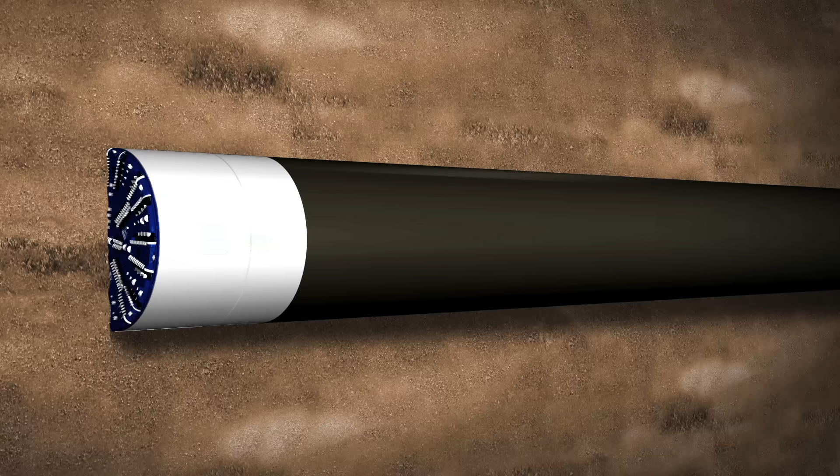When it opens in 2018, Crossrail will connect 28 existing stations to the West End, the City and Canary Wharf through 21 kilometres of new twin-bore tunnels under central London. 8 tunnel boring machines, or TBMs, will drive through the ground to create Crossrail's tunnels.

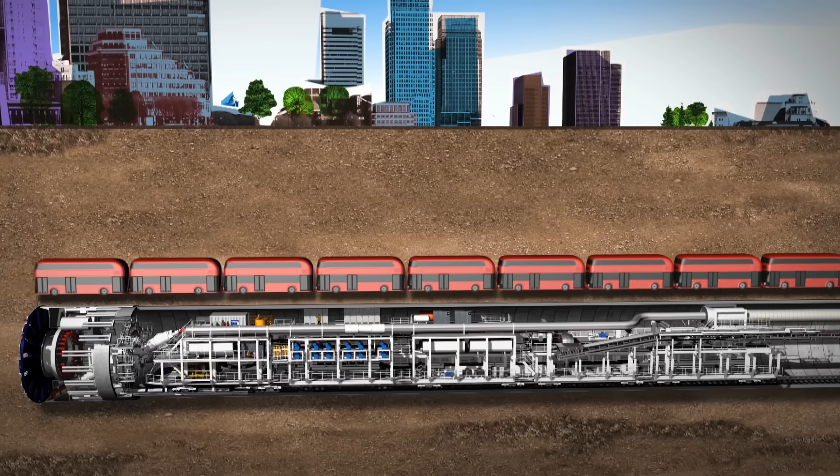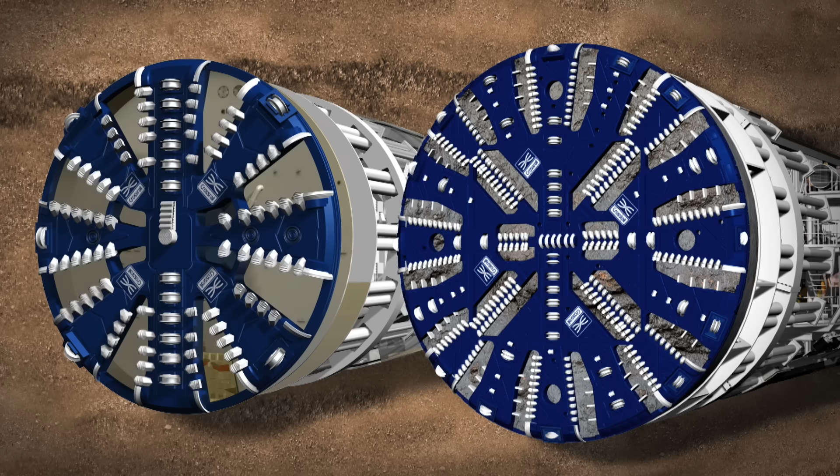A TBM is 148 metres long and weighs 1,000 tonnes. This is the equivalent of 14 London buses end to end and a staggering 143 buses in weight. It has a rotating cutter head at the front and a series of trailers behind housing all the mechanical and electrical equipment. There are 2 types of TBM being used by Crossrail: earth pressure balanced TBMs and mixed shield TBMs.

6 earth pressure balance machines will be used for the 18 kilometres of tunnel through the clay to the west and the riverbed deposits in the east, while 2 mixed shield machines will be used to drive the tunnels through the chalk beneath the River Thames. Depending on the geology below and the buildings above ground, each TBM will travel between 90 and 150 metres each week, ending up to within a millimetre of where it needs to be.

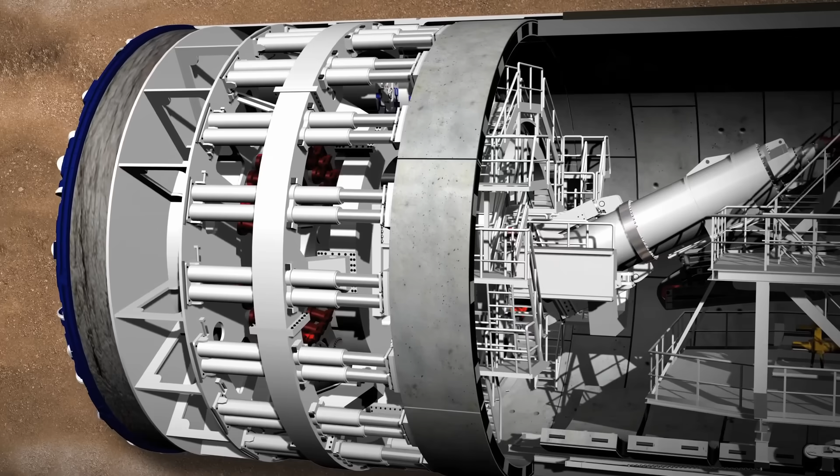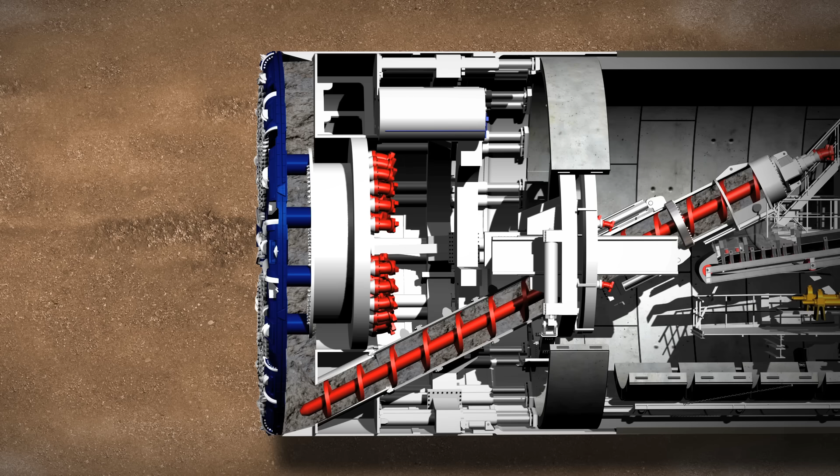The first part of the TBM's work is the tunnelling phase. The earth pressure balanced TBM has a cutting wheel which is pressed against the tunnel face by hydraulic cylinders. Inside the cutting wheel, the disc cutters and scraping tool loosen the material. If the earth is unstable, and to stop the tunnel face collapsing or digging too fast, the TBM uses the soil that has already been dug out by the cutting wheel to support the tunnel face. This creates a stable environment for the tunnelling to move forward.

The tunnel face is continuously monitored by pressure sensors. They check the turning power of the cutting wheel and the screw conveyor, and they also keep track of the material that's been excavated. The material is then taken away on conveyor belts. Once the tunnelling phase is done, the cutting wheel and screw conveyor are stopped and the ring building phase starts.

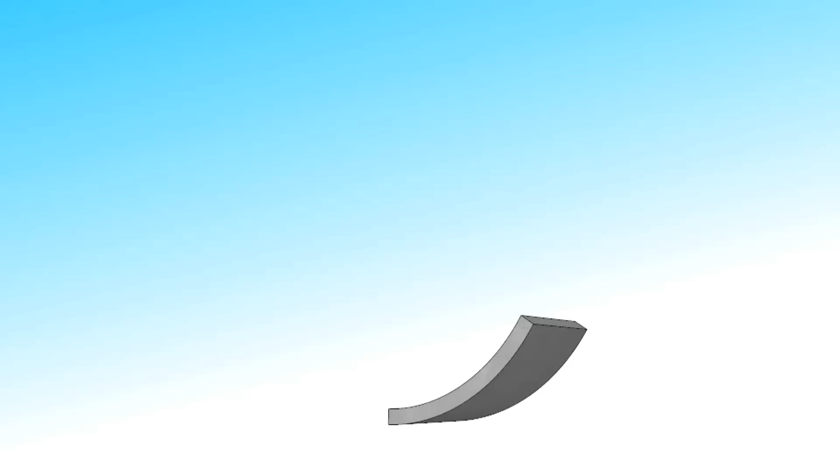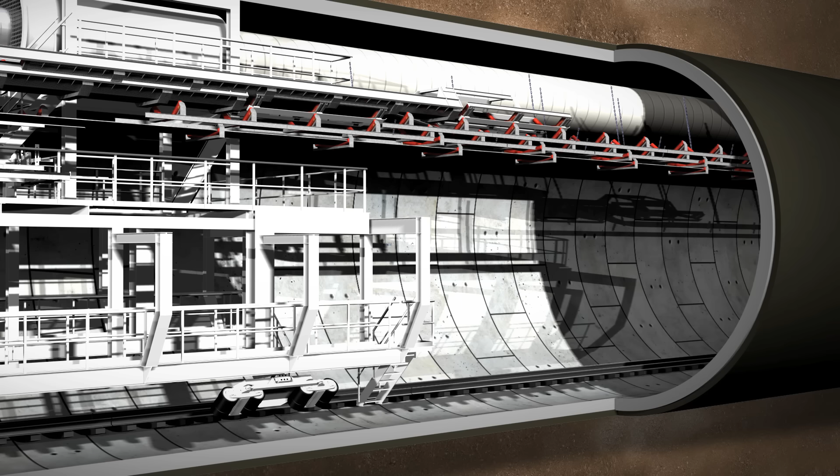A complete tunnel ring consists of several lining segments made of pre-built reinforced concrete. These are made in a special factory above ground. They must match the exact size required and are taken into the tunnel on flatbed rail cars. The concrete segments are fed in by the segment feeder and lifted into place using a vacuum. The hydraulic cylinders are temporarily retracted in order to provide enough space for the new segment.

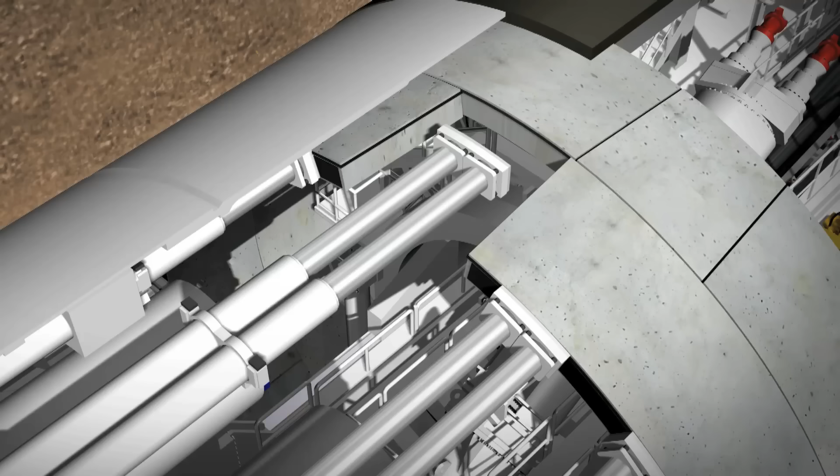The segments are positioned with millimetre precision and held in place by cylinders before being finally bolted into position. The conical keystone is put in from the front to complete the lining ring. Each individual tunnel ring is built in a slightly conical form. This means that curves can be built along the tunnel route by changing the direction of the cone. The hydraulic cylinders are extended again to secure the segment into position.

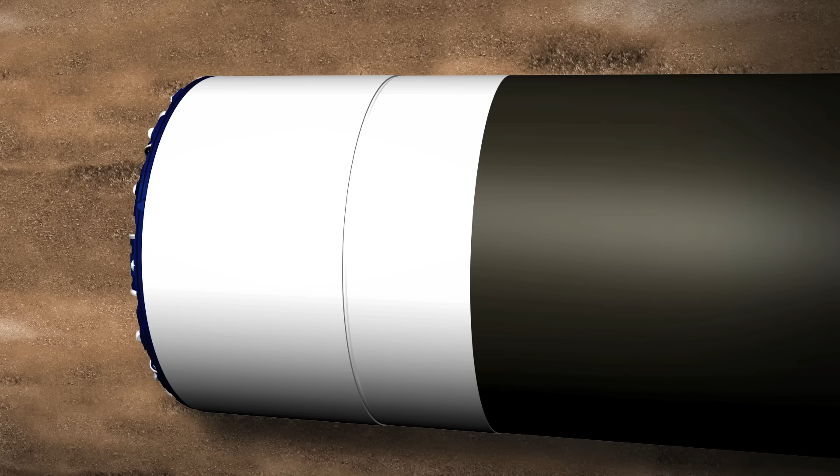During all this work, the people and machines are protected by the shield skin from the saturated ground where water is under pressure. All the readings are displayed on monitors in the central control cabin and fed back to the machine operator. Once each section of ring building is completed, the next tunnelling phase can start.

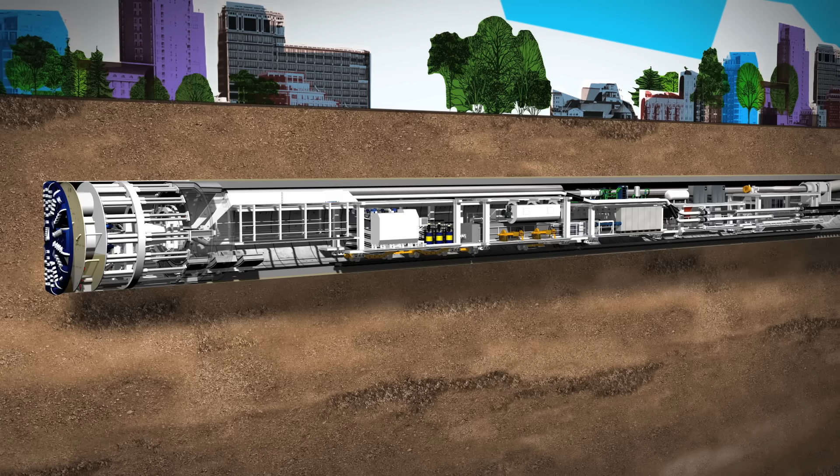The mixed shield TBMs dig in a different way to the earth pressure balanced TBM and will be used for tunnelling in waterlogged conditions such as below the Thames. Mixed shield TBMs use bentonite, which is a slurry of clay and water, to support the excavation face and act as a suspension medium for excavated material.

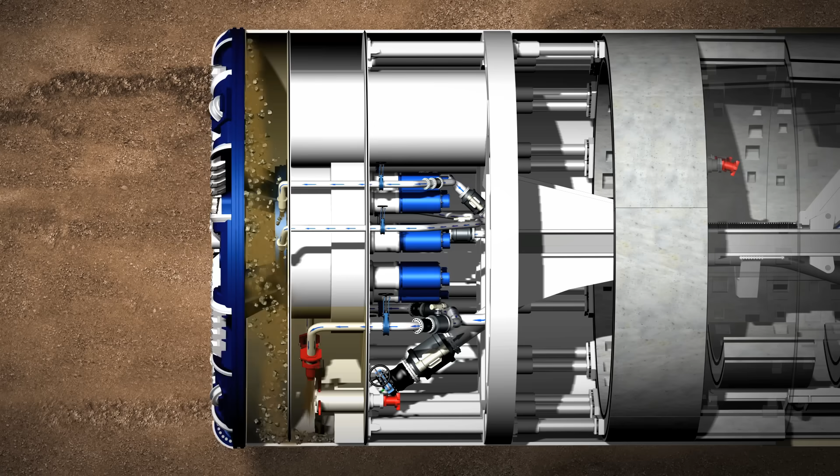The excavation chamber is behind the cutting wheel and separated by a submerged wall from the working chamber. The excavation chamber is completely filled with bentonite and the working chamber is approximately 2/3 filled. The 2 chambers are connected in the form of communicating pipes via an opening in the submerged wall. A filter cake is created ahead of the cutting wheel by pressurizing the bentonite in the working chamber with compressed air. The bentonite penetrates the ground to form a membrane which holds back water. Changes in the soil can be handled by adjusting the pressurization.

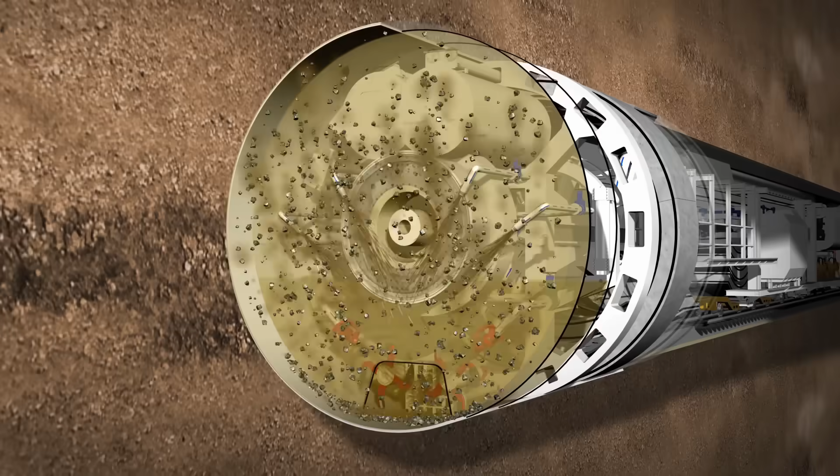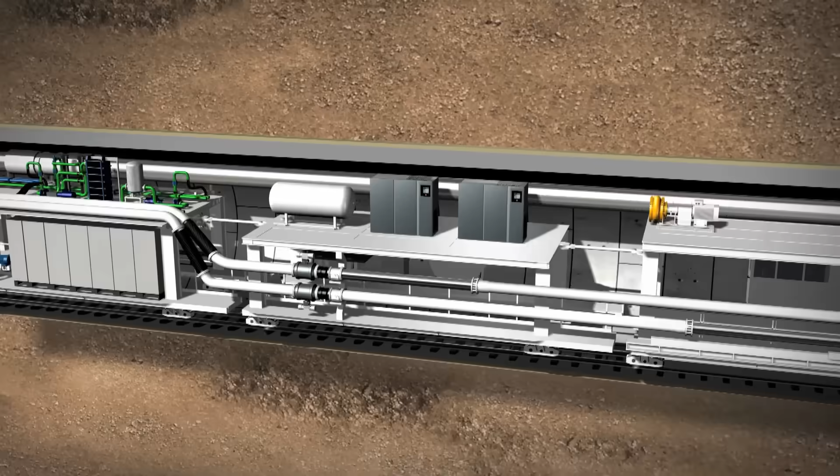The dug-out material falls into the excavation chamber. Small grains are dissolved into the bentonite and bigger stones and debris fall to the bottom. Flushing nozzles guarantee smooth removal of the excavated material. The excavated material is pumped through the suction line to the separation plant at the surface. Here, the soil is separated out and removed from the bentonite suspension through a centrifuge, and the clean suspension is transferred back into the slurry circuit. As tunnelling advances, the flexible extension lines are installed to extend the lines after each thrust phase.

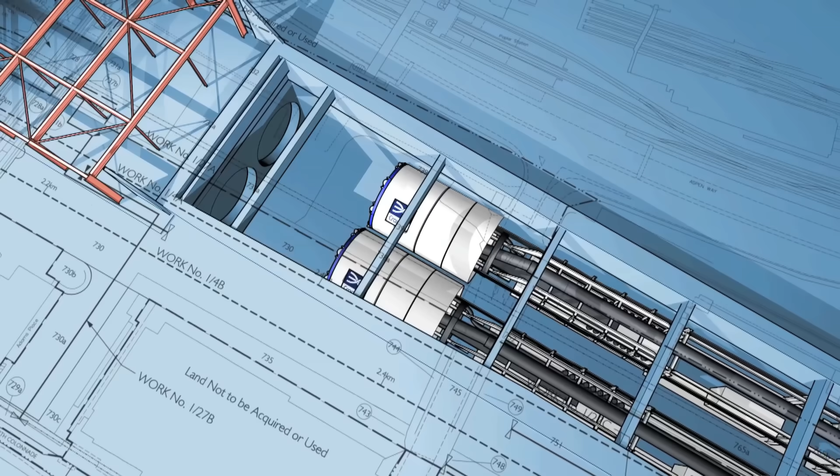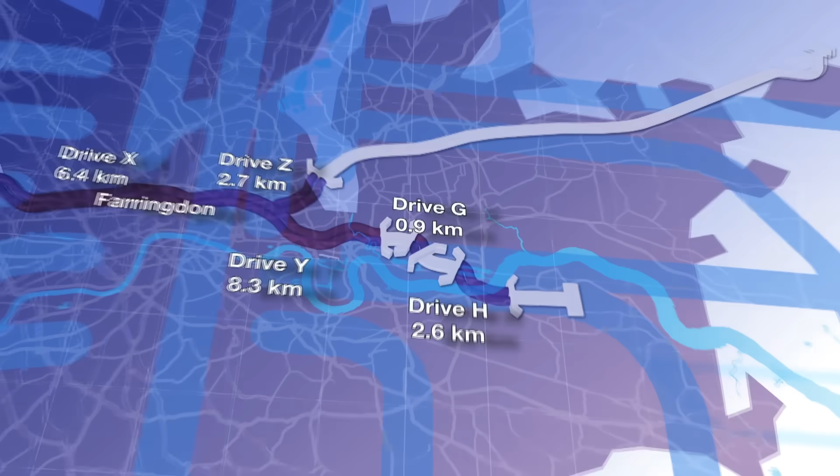Crossrail's first pair of TBMs, Phyllis and Ada, will construct Drive X, travelling from Royal Oak to Farringdon. A second pair of TBMs, Elizabeth and Victoria, will construct Drive Y, starting from Limmo in Docklands and heading under central London to Farringdon. A further 2 TBMs, Mary and Sophia, will construct the tunnels for Drive H, running underneath the Thames from Plumstead to North Woolwich, followed by Drive Z and Drive G. All the tunnels will be completed by the end of 2014, a significant milestone in the programme to build the largest addition to the South East rail network in 50 years.